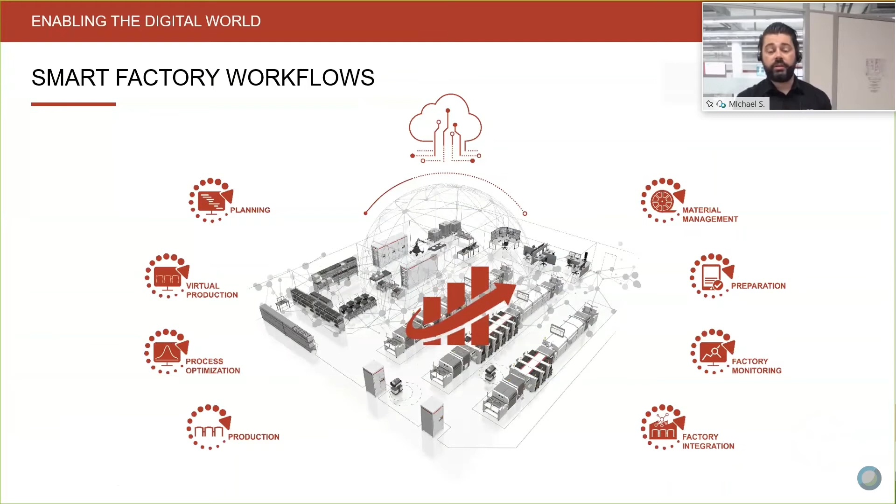So let's start with the automatic process optimization. As most of you maybe know, some don't, we have all our products included in workflows. Workflow meaning planning, virtual production, process optimization, and so on, where you can find yourself during production on your side. Process Expert is part of one of these workflows. This is process optimization, and we have several parts included in this, and these are 3 of them.

At first we have a virtual print based on the Gerber data, and this Gerber data is used to determine suitable process and printing parameters. So at the end, you will get failures out of the Gerber data, or where the print may not be the best, and how you can improve that.

Second, you have autonomously controlled multi-variable experiments. So we have a fractional experiment where we change parameters of the printer, measured by the SPI, and this is to improve the process completely in line, to get a better yield at the end of the line.

And last but not least, we have the continuous monitoring, adapting and controlling the offset all the time, optimizing the production process and reacting on trends, not on failures. That's the most important thing, because normally a normal SPI or normal closed loop reacts mainly on failures. We don't want to create failures, we want to act on trends. And don't forget the self-healing functionalities; I'll go into detail later on.

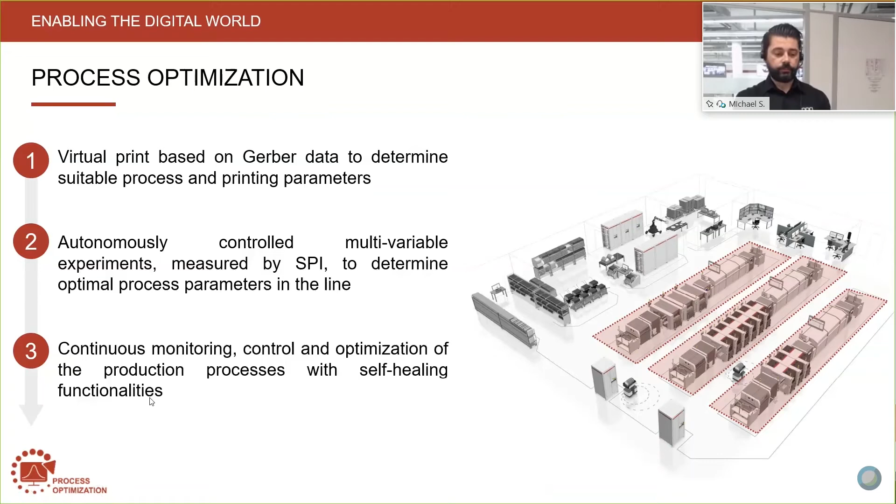So first, we have the Process Expert in line. There you see the DEK printing solution and the ASM Process Lens, which is the hardware of the Process Expert. And we are not ending with that. We are DEK, so we can support you with all the process support products, which means stencils, supports, consumables, whatever you need, you get it from one hand from the DEK side.

And this is a part of our Process Expert, the pre-placement. As you see, this is the first step, Process Expert pre-placement, where we're working right now. But let's have a sneak into the near future, which is the Process Expert placement, where we want to include the SIPLACE placement, to improve the process here as well, to support the operator, and to improve failures about nozzles, pickup rate, and so on. The next step is the future as well.

Sorry, I have a slow-mo here.

The post placement, the ASM Process Expert post placement, where we're working right now with Viscom to have an interface between Process Expert, Process Engine, and the AOI, so that you can see failures on the AOI and what was happening in the SPI and the printer. Maybe you can adapt some values, some limits, whatever. Okay, but this is the sneak into the future, and we're at the status quo.

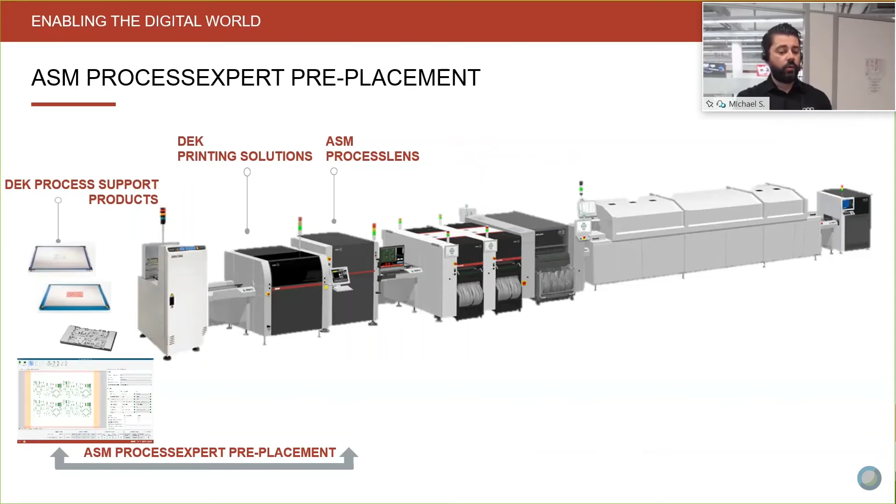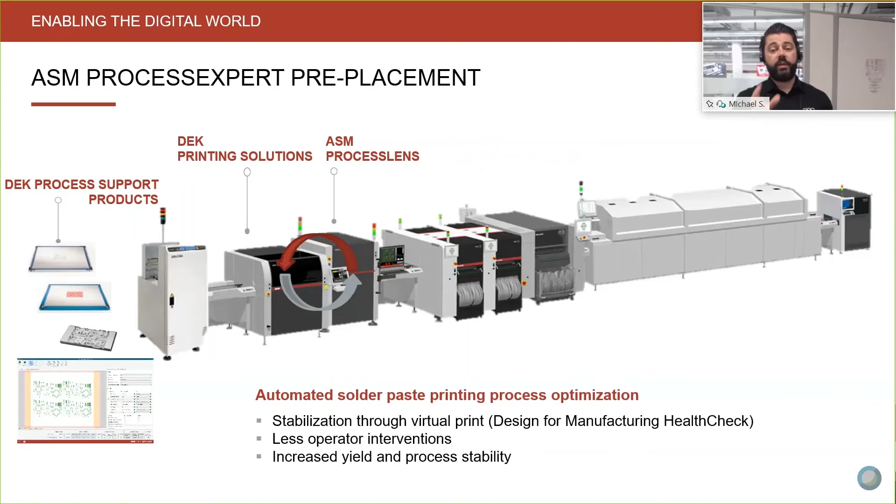The status quo is the pre-placement, where we have the automated solder paste printing process optimization, and where we want to stabilize the print before you start. This is called design for manufacturing health check. This is what I told you before, that you're working on the Gerber data before you go inline, before the complete NPI phase. We have less operator intervention as a goal, and we want to increase the yield and stabilize the complete process in line.

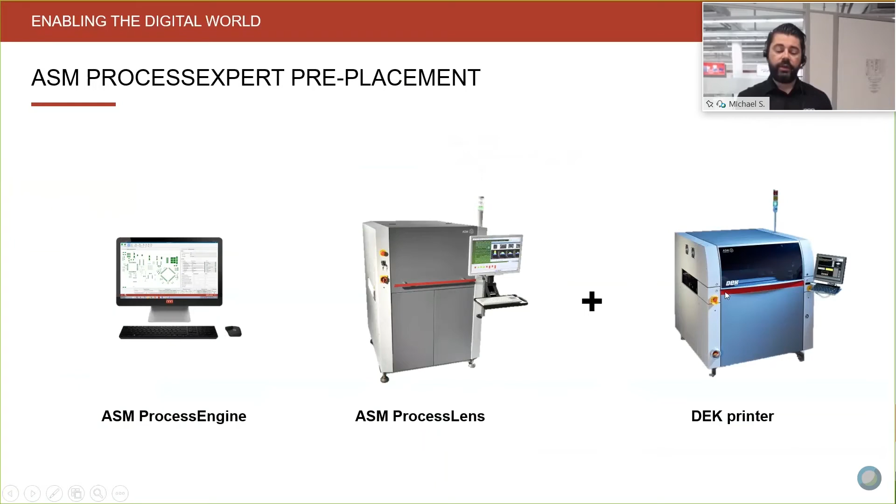So what is Process Expert pre-placement? In fact, it is the Process Engine. We have the Process Lens and the DEK printer, and this is the Process Expert. The hardware is called Process Lens. It's an SPI or SPM. And we have the brain, which is the Process Engine, which takes care of all the stuff in the background. In combination with the DEK printer, we have the complete solution. But let's go into detail about the Process Lens and the hardware.

The hardware is a so-called 5D inline system. 5D is very important. It's not just marketing. It's really 5D because we're mixing 3D and 2D inline. So very important, if you have a 3D measurement, you have a lot of peaks, you have a lot of background, because you have the solder resist, you have the copper, you have a lot of peaks inside, and you don't know exactly where the paste is ending and where it's starting.

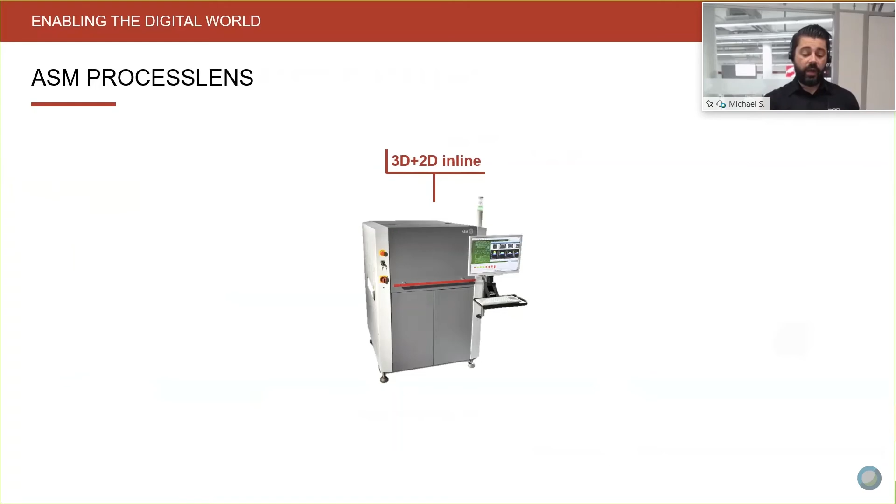So what we do in combination, we look on top, and we can definitely say with a gray value where the paste is ending and starting. So we're mixing these 3D and 2D to get a 5D inline system, to have just the real volume, the stable volume of the real measurement.

Next, we are using the Moiré phase shifting. This is very common in the business, that you have phase shifting with a Moiré. You have a defined field of view of the system. And within this field of view, we're making 16 pictures within a very short period of time. And so we have 3D and 2D pictures for one field of view.

We have on-the-fly PCB warp compensation. This is very important because if you don't have the right focus for the aperture, you will never have the right volume detected. So we're detecting the Z-axis all the time, and we are adapting the Z-axis for always having the right focus on that.

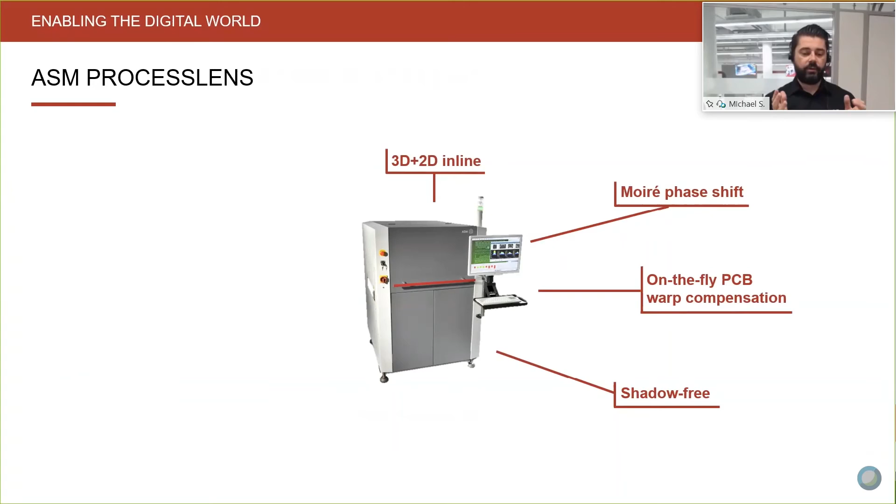We are, of course, shadow free, because if you have shadow from one side or the other side, the volume won't be right. So we have different lightings from a lot of sides, and two projectors from right and left. And so we don't have any shadow.

Very important as well, if you come and see the machine live, you will see a lot of stuff from ASM and the SIPLACE side, like transport. Very important in this case is the camera X and Y position accuracy, because your axis is bending. If you're starting with 20, 25 degrees and you're ending with 50, 60, 70 degrees, the axis is always bending. So this has to be compensated, and SIPLACE has a lot of patents about that. So we're working with that to compensate the focus all the time on the fly.

Of course, we are at the moment proven for 01005 capability. The next step will be 0201 metric. We're working on that with a higher resolution, but at the moment 01005 is proven and it's allowed for the system. And of course, high-speed programming and the big SPC package is included in the machine because we want to analyze the data, show the data, and of course have some nice pictures in the end. So this is all included inside the machine.

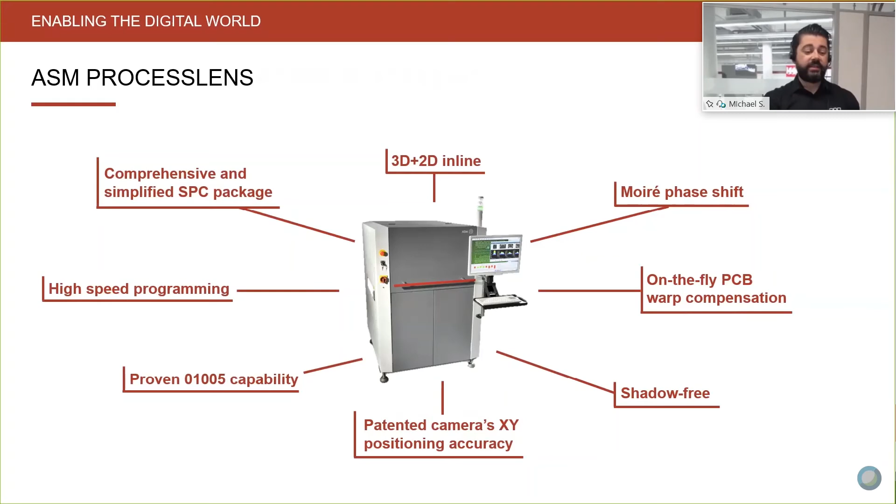That's the technical part. And if we go one step further now, we have the engine, which is the brain I told you, the process engine. And the engine has different phases. We're starting with the first phase, I told you, with a virtual print. And this is really before production starts or the stencil is made. It's long before the NPI phase. What we're doing here,

I lost my screen, guys. Share. Sorry for the interruption. Now you're back again. Should be all good.

Okay, back again. First phase of the Process Engine. We have the DFM, Design for Manufacturing HealthCheck, where we optimize the process design before we start with the real stuff. To go a little bit into detail, we have the screen of the process engine of the DFM HealthCheck, where we included the Gerber data from the board and the stencil later on, then we see red, yellow, and green areas. Red is definitely not printable, for instance for the top clamping, for the squeegee. Yellow areas are not reliably printable, and green areas are definitely printable.

So we need input from your side, for instance changeover frequency, batch size, throughput, solder paste type, high speed, mid speed, low speed. And what we definitely need as well is the surrounding of your printer. What kind of printhead do you have? What kind of squeegee material, stencil coating, support, clamp type, paste type, most important of course, and stencil thickness. And because of these values, we can say which area is printable and not printable.

And this is very important because for the printer, we don't have any IPC rule. Maybe we have four general rules like the 5-ball rule, 7-ball rule, area ratio, aspect ratio, but that's it. The rest is all about experience. And what you have here is all the experience. We counted 300 years of experience from our colleagues that worked with this system. And this is status quo; it's getting more and more. So what you get is a lot of experience here, including the four rules, to take care of the print before you start to print, before the stencil design and all the other stuff.

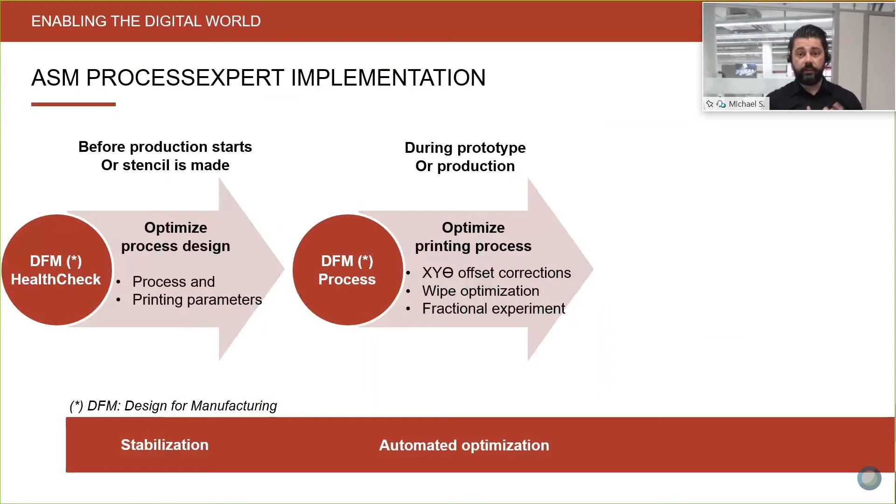And the third one is a fractional experiment. Fractional experiment means really we are taking care about the printer. We are operating the printer. We're changing values like print pressure, separation speed, and print speed in different variations.

So let's go in detail a little bit. We have here the SPC data about the ProcessLens. And what you see here, we have the offset in Y, where you can directly see the print direction, front, reverse, and you have the offset in X as well in combination. So after the first adaptation of the offset, you see the offset is going lower and lower and lower. So this is the goal, what we want to have. We want to have a real close process, and after that we can start with the rest of it.

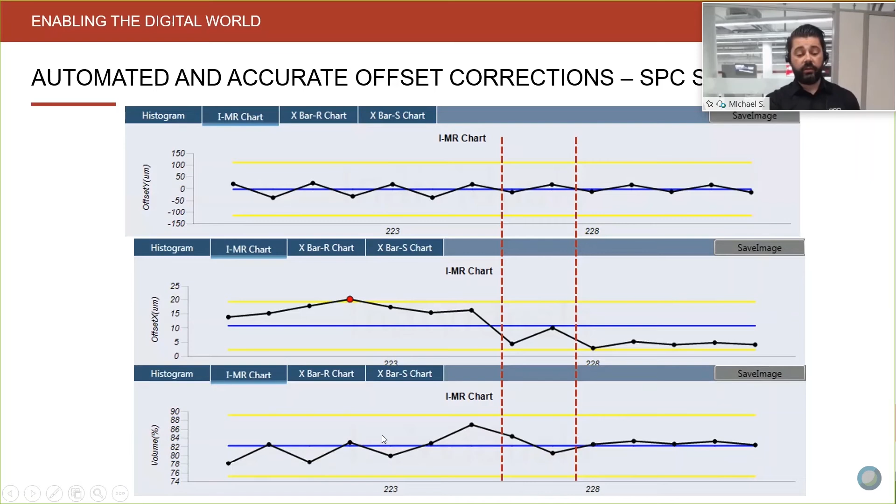So what you see in transfer, if the process is getting closer and closer with the offset in X, the volume as well is getting closer to your mean value. Of course, that's very easy to understand. If you're not directly on the landing with your paste, your volume will always differ. And if you're directly on the landing, you will have a repeatable volume of your paste. So that's what we want to have at first step.

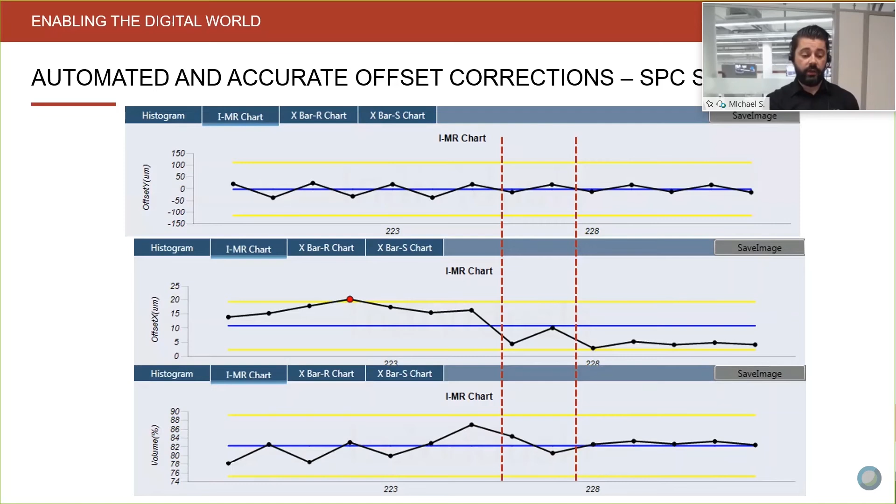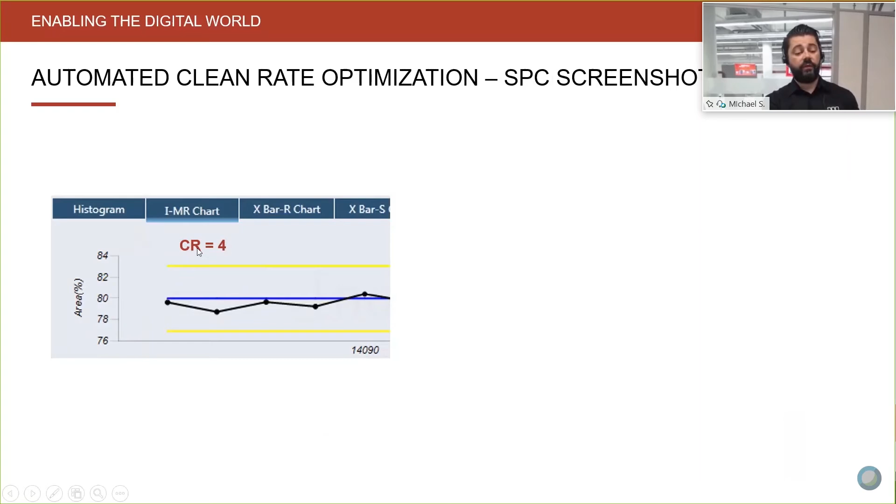Second step is clean rate optimization for the initial one, the first one. So in this case, for instance, we're starting with 4 boards, and after 4 boards the offset is in a good shape, we're starting to print to deterioration, so to the end. In this case, we're starting here 1, 2, 3, 4 boards, 5 boards, still within the limits, 6 boards, 7, and the 8th board is out of the limits of the area. And so we say the failure was between 7 and 8, so we go back to 6, and we get a clean rate of 6, where we started with 4. This is the initial stuff.

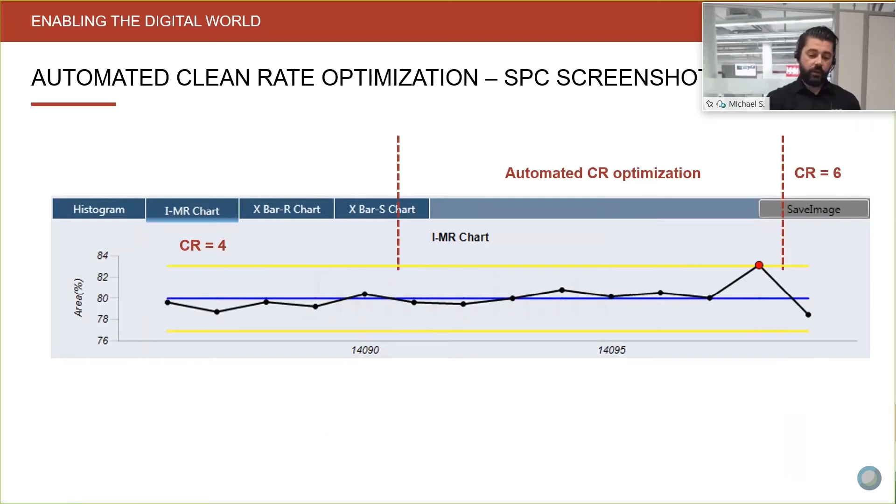And what's the big benefit about this experiment? If we change a parameter, we're saving that to the program. And later on, if you go next day or day after, you have these changed parameters saved to the program, and you're starting with a higher level of a stable process. So this can be improved all the time.

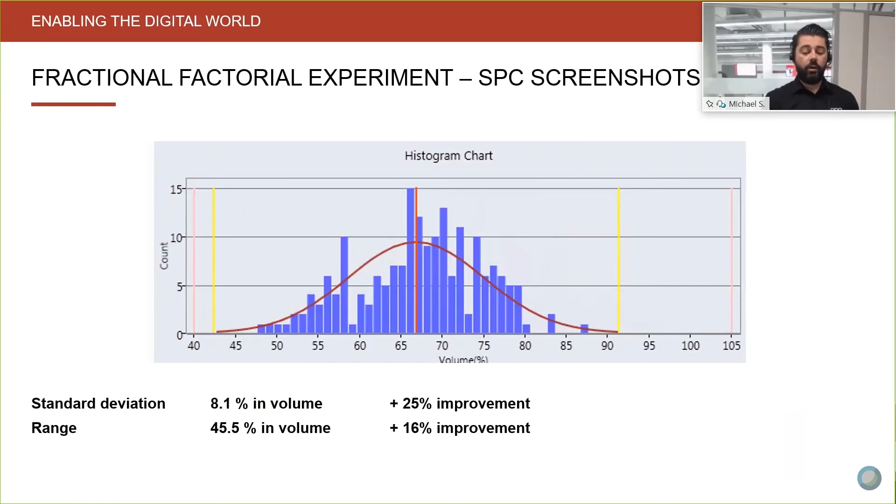Okay, and last but not least, we have the real stuff during production, where we still have the offset correction on the fly, where we still have a wipe adjustment, but not like the initial one with a higher step, but only in plus minus 1. And last but not least, we have a self-healing function, which means if we have, for instance, a bridge coming twice, one board and the next board at the same area, there is a high chance that we have some stuff below the stencil. So we do a self-healing cleaning, which doesn't affect the normal cleaning cycle.

Good, but not too much theory, a little bit more about the real world. So I show you a video, and in this video you can very easily see what it's all about, because you see now here the process engine viewer, and with the process engine viewer you see the process engine, the printer, and the process lens, for instance, as well as software version, which program is loaded, and you see all the actions which the system is doing, and you can easily follow

during inspection here. As well, you can do all the stuff fully automated or half automated, so the line engineer, or whoever is taking care of the complete process, has the full action plan here. So if we start with a live tracker, you see a ball, and a ball means, if you look at the legend, we have a clean first, then we have a production board, the square is a board, you have a yellow one, we have a green one, and you see the blue arrow, which means the print direction.

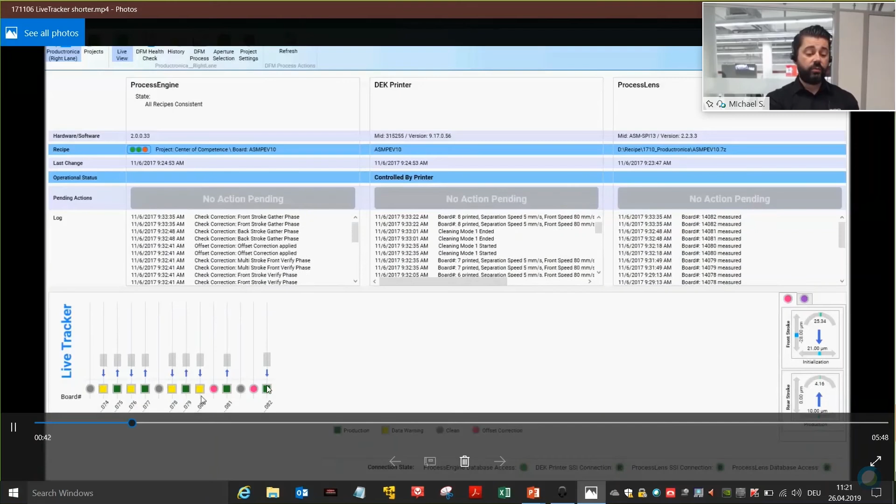Wait, after the second one. Then we have to apply offset correction. You see the purple ball. And this means the first print direction is applied for the correction. Then we have the second direction. And after these first corrections, we will definitely have 4 boards in a row which are within the limits of

the engine. Very important to repeat, maybe I didn't mention it before, the limits from the engine are very, very close. Much closer than the limits from the process lens, from the SPI itself. Because whatever we want to change with the engine in the background shouldn't affect the SPI rules, the SPI limits. So everything that we're doing here doesn't mean that we're producing bad boards. All the boards will be within the range of the SPI.

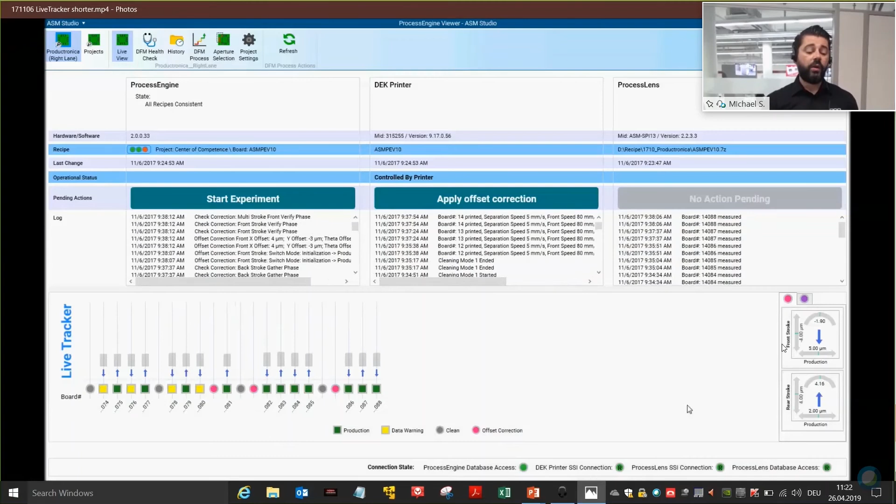So we go further, and after the offset correction, what you see on the right side, the rear stroke, front stroke, and the actual offsets, quite in a good shape now. And after all this is done, we are doing the initial cleaning adaptation. You see on the right side the history of the cleaning, and we're starting with 4 in this case, like you've seen before, 4 boards print, 4 boards print. And now, after the offset is good, we're starting to print to deterioration. Means until we touch the limits of the lens itself.

So that means now we have 1, 2, 3, 4 boards. We have a fifth board, number 6, then 7, and number 8. Now we definitely have something in between here because the history goes from 4 to 6. So we have 8 boards. The failure was something between 7 and 8. So we go one step back to number 6. So this is the initial start. That's what we're doing for the production start.

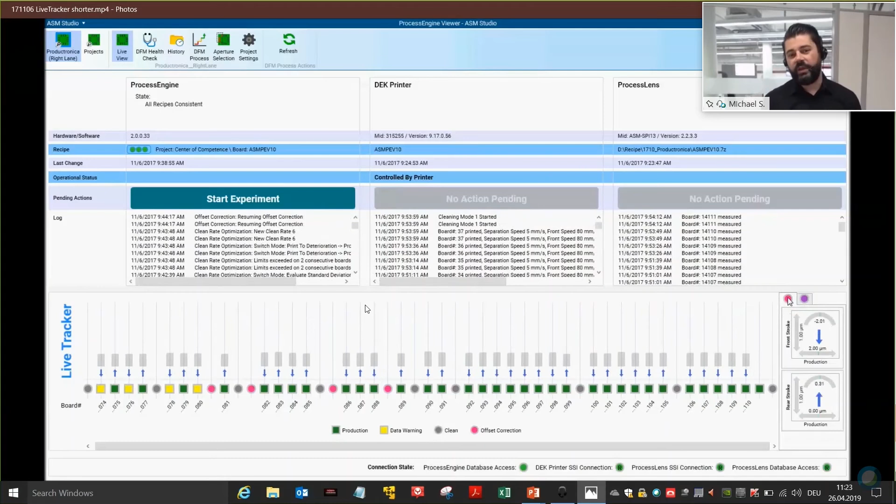What we're doing after that for the cleaning optimization is that we compare 6 boards with the next 6 boards and with the next 6 boards. So we compare number 1 with 1, 2 with 2, 3 with 3, and so on. And if the standard deviation is still good for this comparison, we go with the cleaning cycle higher or lower. If the process is not stable within the range of the engine, we go lower, and if it's stable, we go higher. So if you have a big batch, the cleaning cycle can end at 20, 15, 10, whatever, depending of course on your board.

So what you see here, we have 1, 2, 3, 4, 5, 6, 1, 2, 3, 4, 5, 6, and 1, 2, 3, 4, 5, 6. And then we have the current one, the previous one, and the next one will occur in one burst. So 7 is the next one. This is what you have during the production. Okay. So far so good for that.

What comes then is we're starting the experiment. The experiment can be done automatically as well, or half automated, whatever you like. And just to repeat myself, it's not affecting the boards. The boards will be good, which the SPI is detecting. The limits are very close, like below 10 microns, where we're touching the process itself. And now we're starting the process here, the experiment. And this is the start of the experiment.

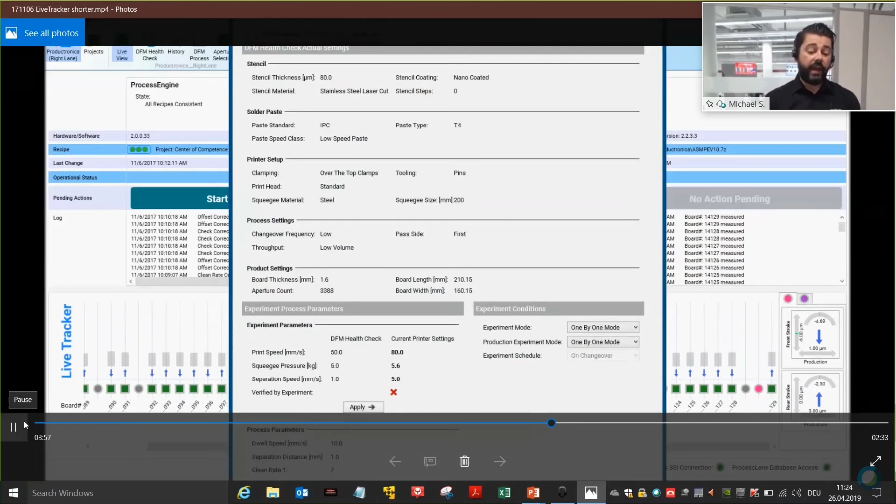You have a lot of data. You can configure it yourself, or you can let us take care of the data. And then you're starting that. And for the experiment, it's very important to understand that we need several boards. One second. So what we have here is 26 boards, what you see in gray. And we need 4 boards at first for the stabilization that we can compare with later on.

Then we have 18 boards where we change the parameters, these 3 parameters like print pressure, separation speed, and print speed in different combinations with high, medium, and low level. And at the end we have 4 boards, which are the confirmation boards, so that we can compare the first 4 boards with the last 4 boards and compare the standard deviation for the volume.

So we're starting with that, and within the engine viewer you can see all the time what the engine is doing, what the printer is doing, which parameters are adapted here, in which kind of setup. And very important to understand as well, we are always cleaning between the 18 boards because the process must be repeatable. Of course, the process won't be good after the print, but it is repeatable after the cleaning. So we are printing, cleaning, printing, and cleaning.

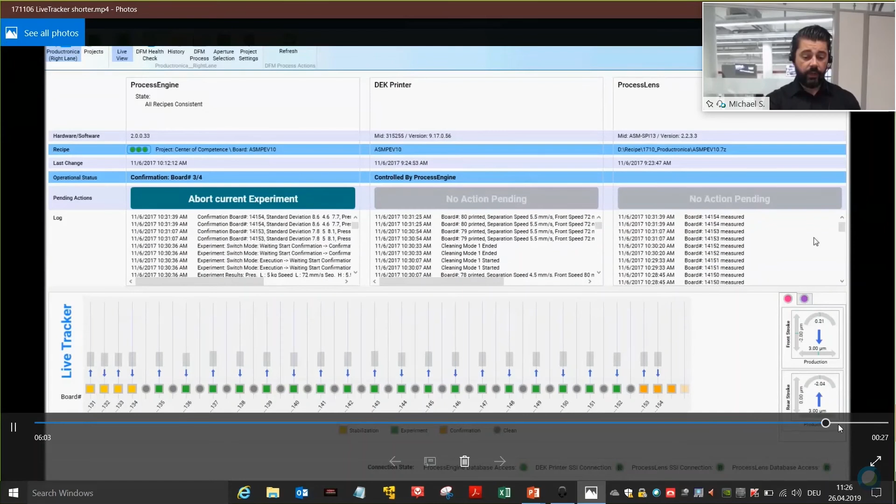And then we go a little bit into the future here and see the end of the experiment. So what we will see is the result of the experiment with the viewer. Give me some seconds. Yeah. So we have here the experiment results.

We have the pressure. We have the lower level, for instance level 1 means 5. Print speed lower level means 72 millimeters per second in this case. And separation speed means the higher level, in this case 5.5. So these values are taken as the best for the future.

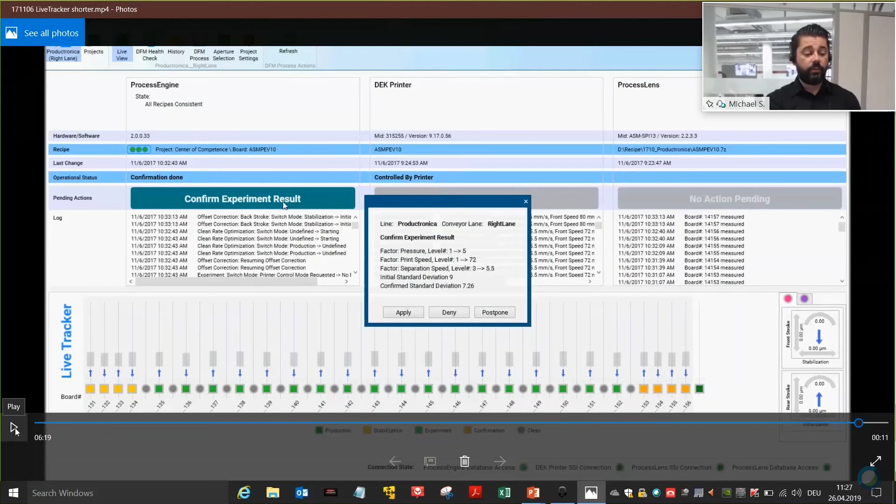So we have an initial standard deviation of about 9, and then we ended with these values with a standard deviation of about 7.26, which is a high improvement for the process. And we apply that and save it to the program, and then we are finished with the experiment and we're saving to your program for the next batch. So that's it for the video.

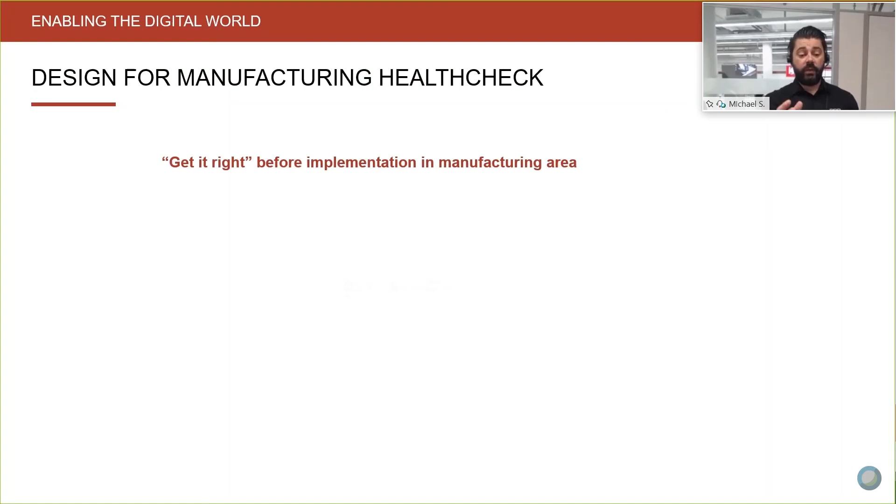We go one step further, and this is the summary of my presentation. What do we have for the design for manufacturing health check? The first step is we want to get it right before the implementation in the manufacturing area. So very important is to shorten the NPI phase, because we want to get the process in control. We want to provide a known and stable good starting point from our DEK experience, and we want to use an extensive and unique process knowledge database from our side.

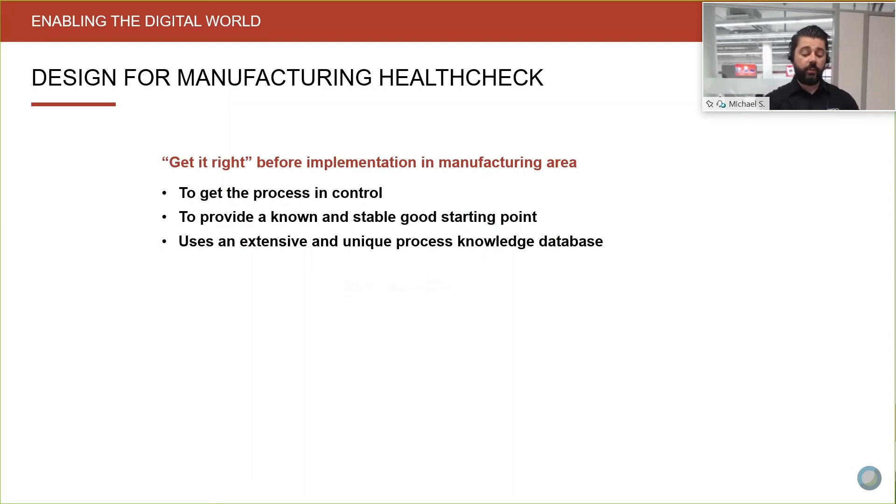So your benefit is very easy. It's analyzing the stencil layout before you do anything, and you get some process parameters out of that. You have a big cost saving and time saving effect of that, of course. Because very often we have customers with a new product, then you order a stencil, you're stopping the line maybe, you're doing some test prints, you analyze that, then you see some failures.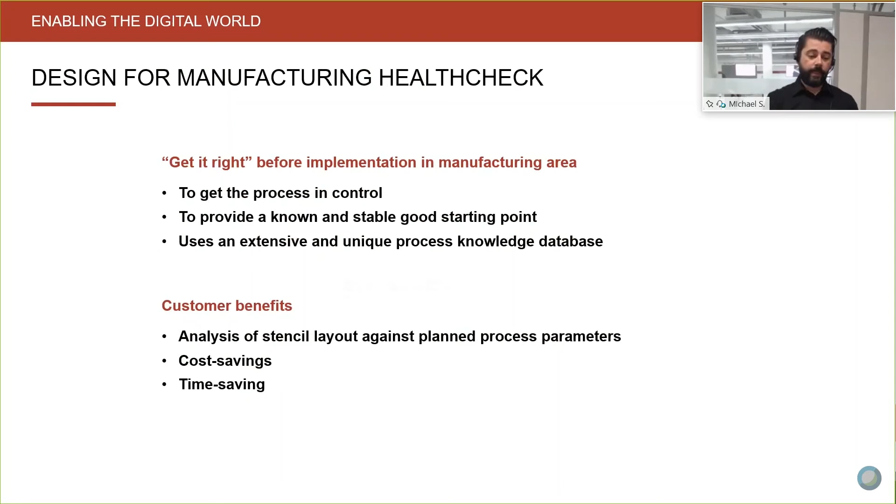So you order the second stencil with some changes, and so on and so on. We have customers who are doing that 2 times, 3 times, 4 times, even 5 times, until they have a stable process. So we will dramatically shorten that with the DFM health check. So check for the DFM health check.

Second is during prototype or production. So we have the automated optimization on the production line. And what we're doing is to maintain the solder paste printing process centered. So this is the first step, definitely, like I explained before. Before we change anything, we have to focus on the offset, and we have to bring the offset very close to 0. And what is important, again and again, we don't want to act on failures. We act on small drifts, on trends, and we don't want to generate printing defects.

Again, we're using our knowledge database for that, and the database is always getting more and more with the experience of your product. So your benefit is easy to understand. It's of course reducing intervention from the operator. Everybody wants to have the operator for other stuff, or wants to have one operator per line in the future. So this is the base for it. Don't create failures on the print. Don't annoy the operator. Don't come to the SPI for doing debugging or something.

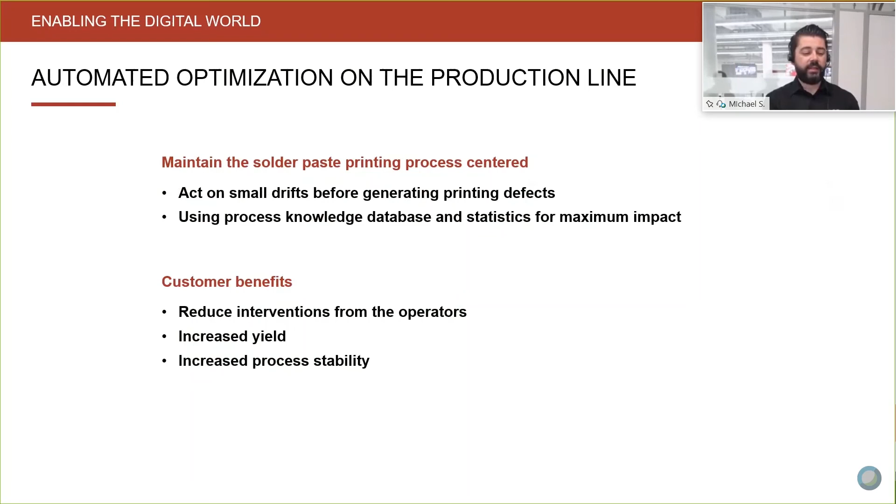We want to increase the yield. Of course, 100% is our goal. For everybody it should be the goal, but this is definitely not realistic, but it's a goal. We want to increase the process stability, and this is most important, of course.

And last but not least, during production, as I mentioned before, we have the offset correction all the time. If you're changing your batch, for instance, if you have a different stretch, we can react on that very easily. We still have the wipe adjustment all the time, which is ongoing, and we have the self-healing function at the end. So you have the stabilization, the automated process optimization, and the proactive control all the time on your system.